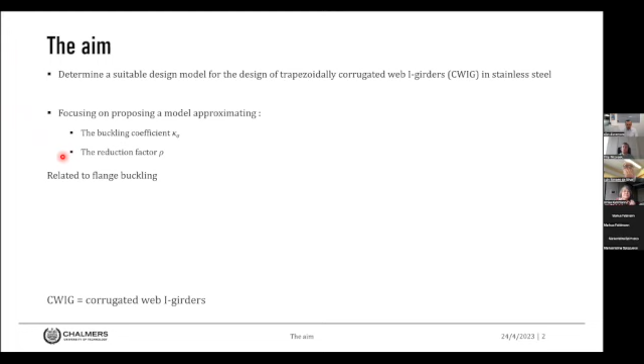In the next few slides, let us introduce a brief background related to our thesis subject. The idea behind using a corrugated web plate is to increase shear buckling capacity, meaning thinner web plates can be used without the need of vertical stiffeners. This contributes to reduced material use and production costs.

The shape of corrugation can vary. For example, it can be sinusoidal or trapezoidal, and the trapezoidal corrugation is the most common one and is the one treated in this thesis.

Continuing to the material aspect, why should stainless steel be preferred over carbon steel? Some major reasons include improved corrosion resistance, higher strength to weight ratio, and better performance in extreme heat.

For the design aspect of corrugated web girders, more specifically the flange buckling resistance, there are various design models available for carbon steel, but there is no commonly accepted procedure. For instance, there are several suggestions on the buckling coefficient used to calculate the relative slenderness used in the Eurocode. And for stainless steel girders, there are no available design models yet.

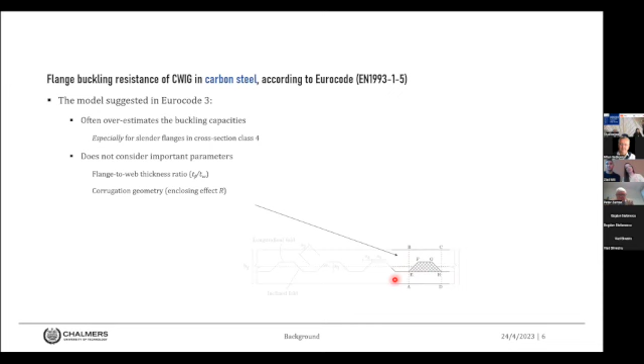There is an experimental and numerical study conducted by Jaeger et al., published in 2017, on the flange buckling resistance of trapezoidally corrugated web girders in carbon steel. This is the most extensive research done on this subject, where 16 girders were tested in 4-point bending to failure. This was followed by a large-scale numerical study on girders with different geometries.

In our analysis, the middle corrugated part in the constant moment region was modeled in the finite element software with the appropriate boundary conditions and two end moments, as seen here.

With the lack of available design models on the flange buckling resistance of trapezoidally corrugated web girders in stainless steel, the objectives of this thesis are to perform a numerical parametric study and investigate the buckling coefficient and reduction factor related to flange buckling of trapezoidally corrugated web girders in stainless steel. The second objective is to establish the relevancy of existing models for carbon steel girders applied to stainless steel beams. And lastly, if these models prove unsatisfactory, a new model is developed.

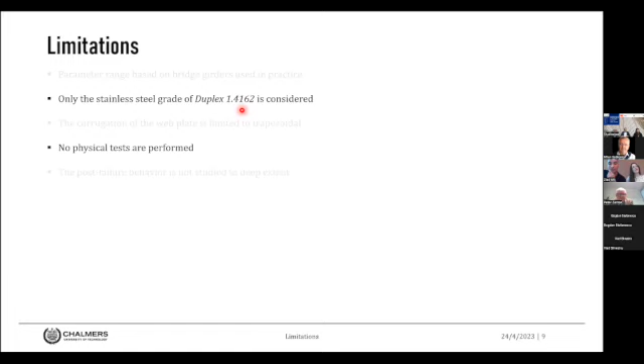Regarding our limitations, we should mention that only the stainless steel grade duplex 1.4162 is treated, and that no physical tests were performed in the study, only finite element analysis in Abaqus.

To conclude the validation study, all observed failure modes in physical experiments on carbon steel girders were reflected in the analysis, and even the ultimate capacities corresponded quite well.

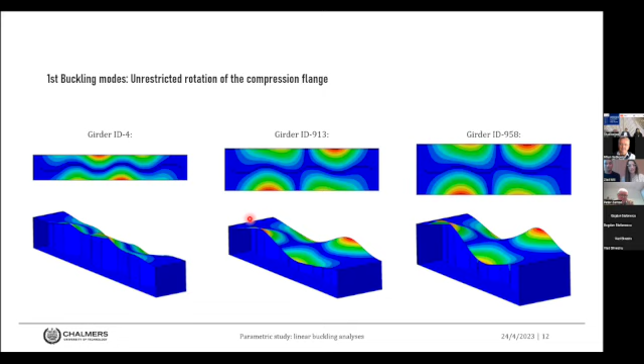The model of Jaeger et al. shows an improvement in scatter and safe-side results, but still considerable scatter. Taking into account more relevant parameters, the developed model of this thesis shows much lower scatter, and the results have an average overestimation of only 3%.

And on to our second half of the parametric studies, the nonlinear analysis. The initial mechanical and geometric imperfections are considered through an equivalent geometric imperfection, where the first mode is amplified by a factor depending on the corrugation geometry.

The required reduction factors from the finite element analysis were calculated as the ultimate moment capacity divided by the plastic axial capacity of a flange times the lever arm between the flanges.

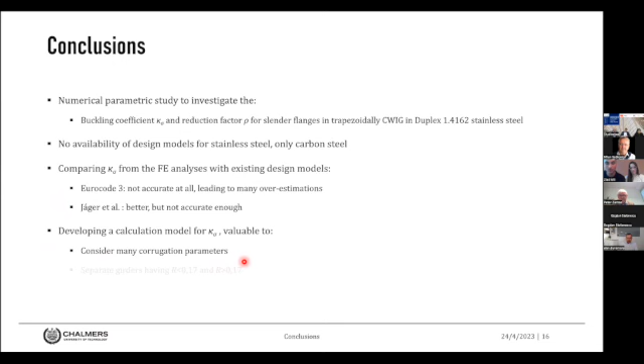And lastly, comparing the ultimate moment capacities from the finite element analysis with existing design models. Firstly, the Eurocode resulted in overestimations for almost all studied girders, and this was concluded to be the result of the too high slenderness limit suggested of 0.748, where 0.4 would be more reasonable.

The model of Jaeger et al. had some improvement in the lower slenderness range, but was still inaccurate. And lastly, the DASt-Richtlinie was the least accurate model.

So, given the results and the gained insight, a new model was developed in this thesis for estimating the ultimate capacity of trapezoidally corrugated web girders in stainless steel.

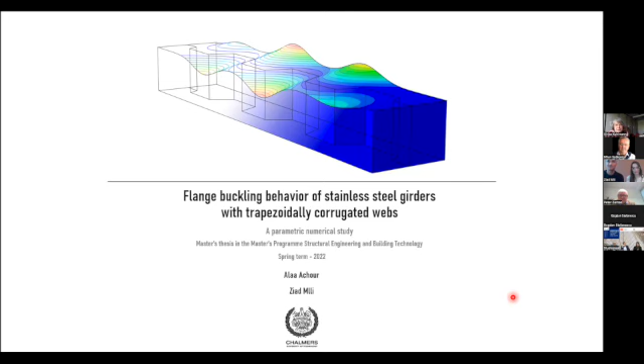Thank you very much for the very nice presentation. I'd like to start with your very beginning where you said that the corrugation mainly has the purpose of working against shear buckling. But concerning this transverse bending, of course, the corrugation also has a certain effect. Can you describe from the mechanical point of view what effect the corrugation has in the transverse direction?

Yes, so a major drawback of having a corrugated web is the reduced axial capacity, actually. So in many calculation models, the actual stiffness of the web is completely left out, not considered at all. So it's only the flanges that are considered to be working in bending. Now for the transverse bending caused by the eccentricity of the flat segments or the longitudinal segments of the corrugation...

That's not something that was taken into consideration or analyzed explicitly. It was purely finite element analysis that were analyzed, and the results were structured in a way that a new model could be developed, partly for the buckling coefficient, and then later on for the consequent reduction factor that could be expected.

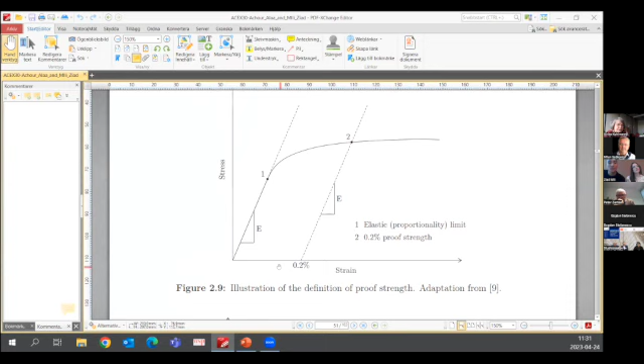But yeah, to summarize, much higher strength, lower stiffness. It reflected the material model.

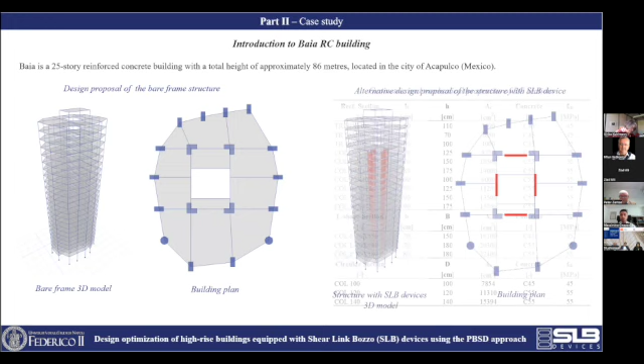The SLB device can be placed in the structure using diagonal steel braces or decoupled concrete walls. This second application is the most widely used today, in which the SLB system is placed in reinforced concrete structures. The case study consists of the structural design of a 25-story reinforced concrete building for which the use of the SLB system has been proposed as an alternative to the bare frame solution. The structural design has been carried out using the performance-based seismic design approach, following the provisions of the reference codes listed here in the slide.

The PBSD approach requires the seismic assessment of the structure considering different earthquake intensities: the service level earthquake, the design level earthquake, and the maximum considered earthquake. Regarding the seismic hazard assessment, the site response spectra were obtained from a ground response analysis of the soil, and at the maximum considered earthquake, the structure has also been analyzed with nonlinear time history analysis, considering the time series given here in the slide.

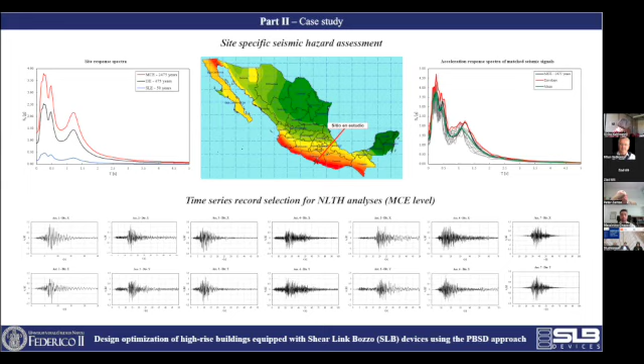The proposed SLB solution consists of 4 concrete walls per level placed from story 1 to 20. Each wall is equipped with 2 shear link devices belonging to the 4th generation, for a total of 160 dissipators. The comparison between the 2 structures, with and without the shear link devices, highlights that the use of SLB produces an increase in the stiffness of the structure, at least in the elastic range, as confirmed by the reduction of modal periods and, more importantly, by the reduction of the interstory drift ratios calculated at the service level earthquake according to a response spectrum analysis.

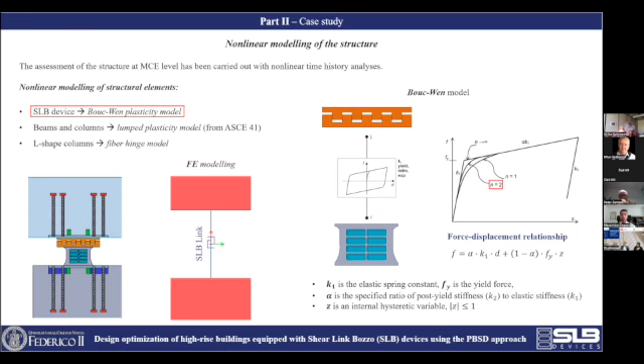As mentioned before, the assessment of the structure at the maximum considered earthquake has been carried out using nonlinear time history analysis. Regarding the nonlinear modeling of the structural elements, the Bouc-Wen plasticity model has been adopted for describing the nonlinear behavior of the SLB device, while a lumped plasticity model has been adopted for beams and columns, in this case following the provisions of ASCE 41.

Lastly, for the L-shaped columns a fiber model has been adopted, and in this case, the cross-section of each structural element has been discretized in a finite number of fibers, assigning to each of them the stress-strain relationship of the corresponding material. These are the main significant results obtained by the analysis at the maximum considered earthquake for the structure equipped with the SLB devices.

The structure meets all the global and local acceptance criteria imposed by the reference codes, and it is important to observe, considering the demand on capacity ratios at the collapse prevention, that the higher values are related to the SLB, while the corresponding ones for beams and columns are quite lower. This means, in other terms, that in this case the energy dissipation is mainly concentrated in the dissipators, as it is expected for this type of structural design.

Lastly, the seismic response of the structure equipped with the SLB device has been compared with the seismic behavior of the initial bare frame solution, also at the maximum considered earthquake. First of all, also in this case, the use of the SLB system leads to a significant reduction in the maximum interstory drift ratios. In this case, of course, comparing this seismic demand with the previous one, it is clear that there is a very strong nonlinear behavior

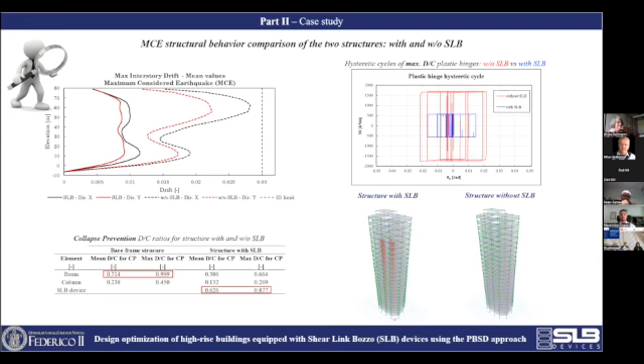In fact, for the structure with the SLB, the energy dissipation, as well as the maximum plastic rotation of the plastic hinge, is significantly smaller than that of the bare frame solution. In addition, the use of SLB leads to a reduction and an optimization in the amount of steel reinforcement used in the other structural elements of around 48%. Considering also an economic comparison between the two solutions, there is an economic saving on the total cost of the structure of around 12%. Therefore, the use of SLB devices is also economically justified.

In conclusion, the advantages given by the use of SLB devices are the reduction of the interstory drift ratios under seismic loads. The energy dissipation is mainly concentrated in the dissipators, and this partially preserves the other structural elements from damage. And there could also be an optimization in the amount of steel reinforcement in case of reinforced concrete structures. In addition, the SLB is a cheap metallic dissipator compared to other types of device, so its use is generally competitive also from an economical point of view.

And lastly, regarding the disadvantages of this system, of course, the assessment of the structure requires more complex analysis, such as the nonlinear time history ones used in these cases, and the use of SLB and their supports may be limited by architectural design choices.

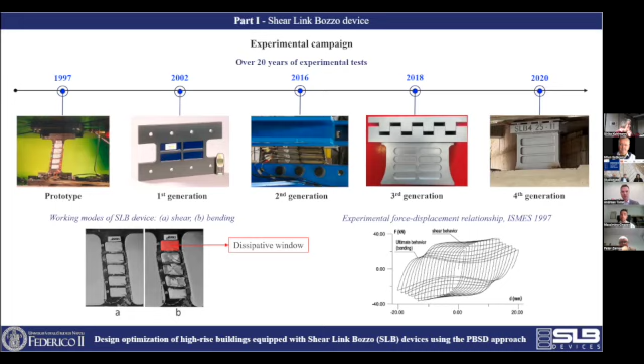Okay. Well, the two main significant features, in my opinion, for this type of dissipator: one is related to the fact that the dissipative windows are obtained with a milling machine. So the initial steel element is reduced in some parts in order to obtain these dissipative windows. So in this case, the stiffeners are not welded to the steel element.

And also the latest SLB generation presents a bottleneck connection, a particular connection to avoid the axial load transfer to the dissipator, because it has this toothed shape in order to avoid the transfer of the axial load to the dissipator under the gravity loads and also under the seismic loads.

But would you say, I understand with the milling you have no weld, just in the dissipative part, because of course then the connection plates are welded. But would you expect otherwise a weak spot in the weld? Is that your concern, or is it an economic question?

No, of course I would expect that. As we know, sometimes welding is a critical issue for steel structures in general, and can sometimes change the mechanical properties of the steel locally. So, if it is possible, I think this can be an advantage if there is no welding. But of course, I don't think it is more economical than the welding solution from this point of view.

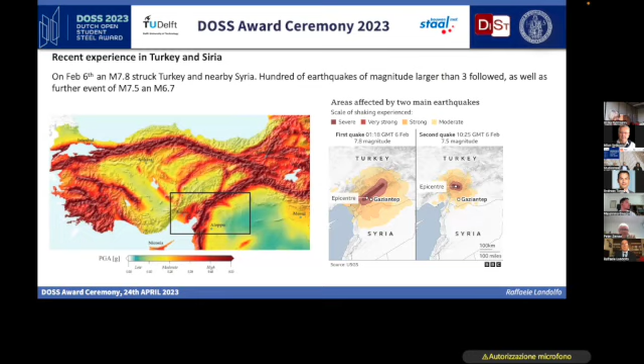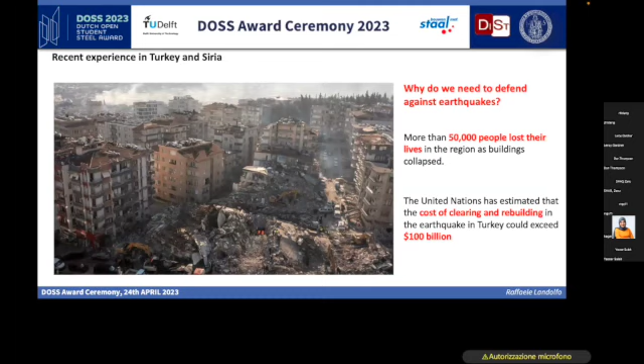A modern way to approach the problem of earthquakes is to talk about seismic risk, because seismic risk is a combination of three main factors: the hazard, the elements at risk, and vulnerability. In an urban context we cannot reduce the elements at risk. So the strategy for mitigation of seismic risk must be based on two actions. The first is a reliable evaluation of the seismic hazard, meaning a good seismic classification of the country. The second is the reduction of seismic vulnerability by means of good design of new buildings and retrofitting of existing buildings.

Now, the question is, what role can steel structures play in the mitigation of seismic risk? We can look to the lessons learned from previous earthquakes. As you can see, the excellent performance of steel structures was stated already in 1991 by the American Iron and Steel Institute after important earthquakes in the USA. Unfortunately, today we do not yet have a detailed report on the damage in the Turkey and Syria earthquakes, but I would like to share with you two experiences.

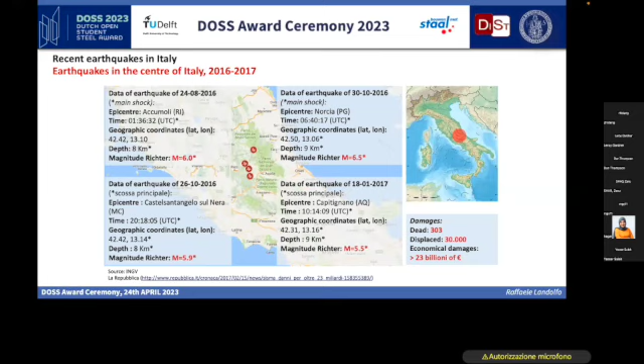And the first experience dealing with an important earthquake that occurred in Italy in 2016. Also, in this case, you can see that the magnitude of the earthquake was higher than 6, with a lot of damage on the buildings, in masonry buildings and concrete buildings.

And I can tell you that after the earthquake, a specific study was performed by a consortium of Italian universities devoted to the assessment of construction damage in the whole area. And as you can see from this investigation, only 2% of steel buildings suffered high damage, while more than 90% of buildings had no damage at all or lower damage.

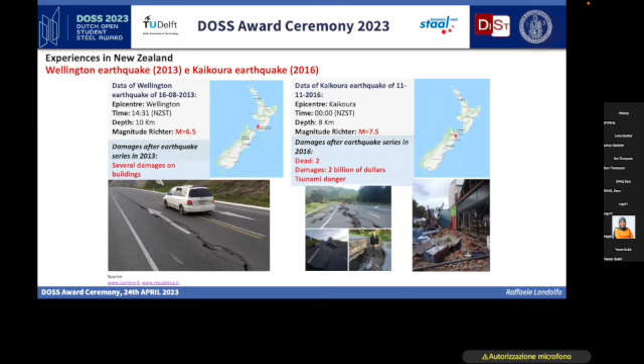The second experience deals with another aspect that, in my opinion, is very, very important for demonstrating the performance of the material in seismic application. I mean, the use of that material in the reconstruction. Here we are in New Zealand; in between 2010 and 2016, there was a very strong earthquake that completely destroyed the city of Christchurch.

We organized a conference in that city in 2018, and during the conference, there was a very interesting presentation from our colleague that demonstrated that more than 90% of the total floor area in the reconstruction of Christchurch was supported by steel structure. So this means that steel was the best option for the reconstruction of Christchurch.

And in fact, the city was a sort of open lab where it was possible to see each kind of steel structure. And this was very, very good news for us. So now I would like to say why steel structures are so resilient for seismic application. Let me just remind you that resilience is a general concept.

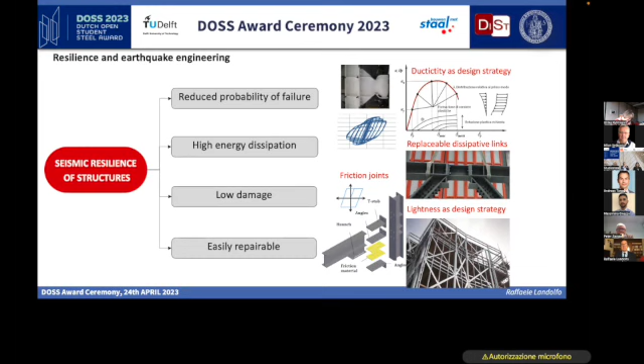If we apply this concept to earthquake engineering, we can say that a seismic resilient structure must provide a reduced probability of failure, high energy dissipation, low damage, and must be easily repairable. Steel structures provide all these characteristics. Why? Because all these characteristics are strictly connected to material properties in terms of strength, ductility, low weight, and repairability.

Let me just quickly say something. If we talk about strength, I can remind you that steel is the material with the highest strength-to-weight ratio. That means good performance, it means lightness of structure. But in seismic application, even more than strength, ductility is very important.

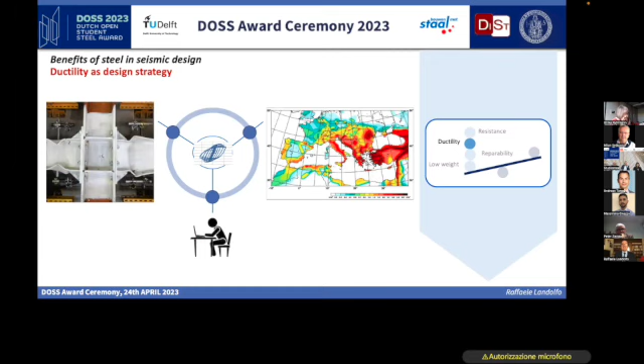And if we look at ductility, we can have excellent ductility at each level: material level, member and connection level, structural system level. This is the reason why, in my opinion, steel is the best solution when you design by using ductility as a design strategy. And because in this case, you can have a lot of options.

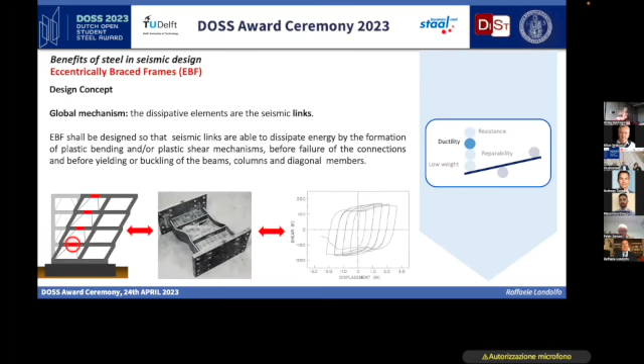For example, in the case of a moment resisting frame, you can locate the plastic deformation at the end of the beam. In the case of concentrically braced frames, you can have good behavior locating the plastic deformation in the bracing. And in eccentrically braced frames, you can use the good behavior of the link for dissipating the energy. But in addition, you can also use the connection for this plastic deformation. So you have a lot of possibilities for well-designed steel structures using ductility.

But this is not the only main aspect, because when you design by using ductility, it means that you are accepting the damage. And this means that you must be able and ready to repair the structure. And also in this case, the steel solution can be the best one, because I will show you later on some systems that can be easily repaired, easily replaced. And this is a very good aspect for seismic application.

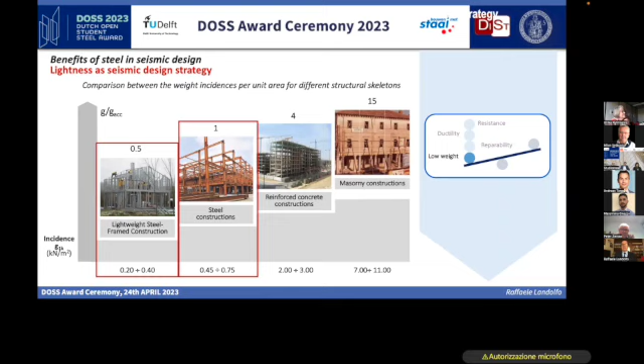Finally, you can also use lightness as a seismic design strategy, because in the case of steel structures, you can also have solutions like lightweight steel framed construction that, thanks to the lightness, can be designed without using ductility, designed in the elastic phase, and so without damage. Let me just quickly show you some research projects in which we can confirm this statement.

The first project is the DUAREM project that was developed by a consortium of European universities. As you can see, during this project, we performed a full-scale experimental test on a dual eccentrically braced frame with removable links. So the idea is to have the plastic deformation in the link, and to use the recentering behavior of the moment resisting frame. And this was a very, very good seismic option.

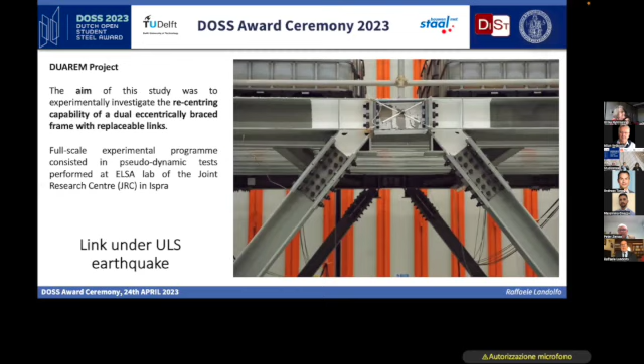Here I'm showing you some video in which you can see the plastic deformation of the link during the test, according to the design concept that I explained before. I don't have much time, so I will go quickly through this movie. And in the next movie, I would just like to quickly show you the phase in which the link is replaced after the plastic deformation.

And these two external moment resisting frames provided the recentering properties in order to have the structure in a perfect vertical position after the plastic deformation. This is an example of having an easily repairable system.

Another example is this project. The name of this project is a FREEDAM Project, in which, as you can see, there is a different concept. This kind of connection is based on the friction dampers. And as you can see from the movie, we can have a very large rotation capacity without the plastic deformation. So this means the possibility to dissipate the seismic energy without damage, without plastic deformation.

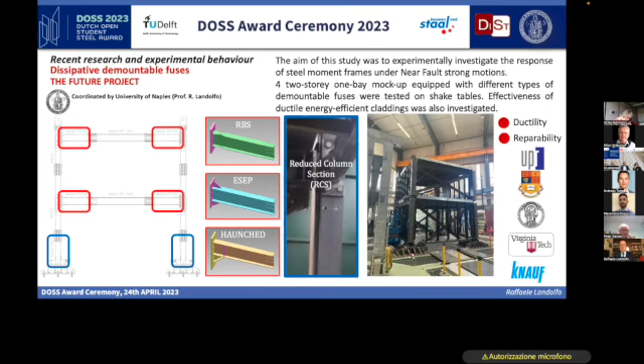And I would like to show you the tremendous... and as you have seen, a tremendous seismic input without important damage. These are very, very good results. Finally,

lightness as design strategy, lightweight steel framed construction. Another research project, European research project, ELISSA project, devoted to study energy efficient, lightweight, sustainable, safe steel construction. The solution in order to get this performance by building was to use a lightweight steel construction that was not only good design from a seismic point of view, but also from energy point of view, thermal point of view, fire point of view, and so on.

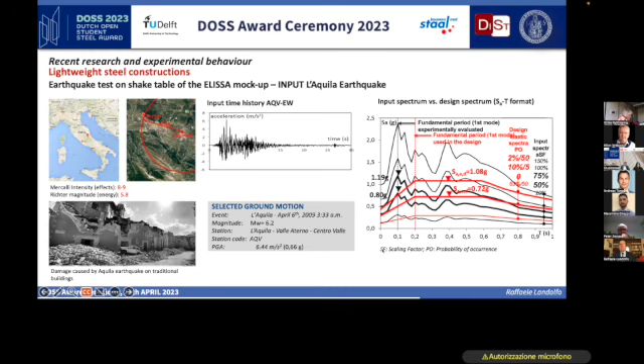And thanks to the lightness, we apply to this system very, very strong real earthquakes. That was the earthquake that occurred in Italy in 2009 with a lot of huge damage. We apply an earthquake 1.5 times this real earthquake. And once again, you will see that the damage will be very, very low due to this lightness.

So, in conclusion, I think that the problem of seismic risk is for sure a crucial issue all around the world. The lesson learned from the past earthquakes demonstrates that steel structures can provide an excellent behavior also in the past. The resilience of steel structure is a consequence of the material properties and technological requirements. And also these projects that I quickly showed you confirm this statement. So in my opinion, the last sentence is, please don't forget to use steel in seismic application.

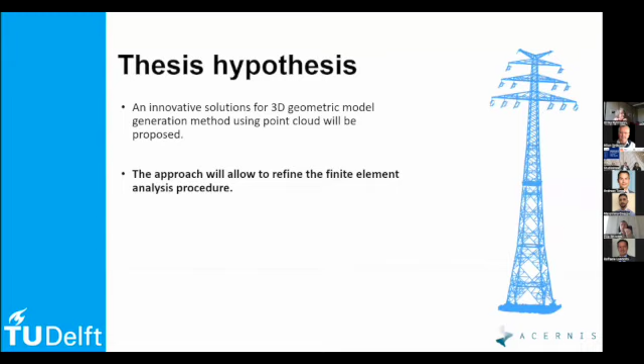What came out of it is that for a lot of those lattice tower structures, there is outdated or even missing documentation for towers which were erected over 40 years ago. This thesis tried to address this problem by proposing an innovative solution to generate a 3D geometric model using point cloud data, which also refines the finite element analysis procedure by using the real data of the structure instead of design documentation.

When it comes to the methodology, I'll focus on the modeling process performed for this thesis. The entire approach can be split into 3 sections, starting off with a global segmentation of our tower into smaller segments. After that, in each of those isolated segments, we identify each member and cluster it into a separate data cluster. At the member level, we detect the corner point of an L-shaped profile and fit a polyline to each member, which concludes the modeling procedure and allows us to generate the 3D model that can later be utilized in finite element analysis.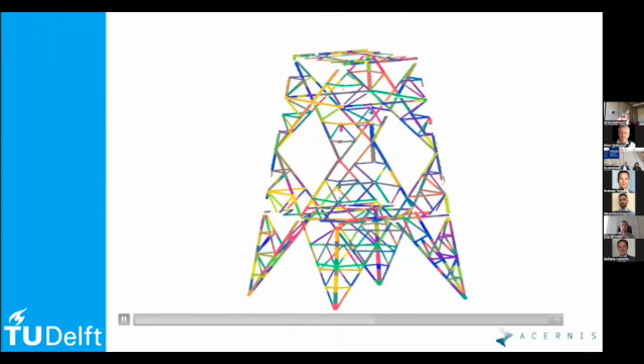Now I will present to you the entire process in a short video. We start off by the global segmentation, and each segment is isolated as depicted in those different colors in the video. After that, in each of those segments, we isolate each member. Finally, for each of those isolated members, we fit the corner points of the L-shaped profile to which a polyline is fitted, allowing us to create the 3D model which we can later use in our analysis.

The proposed method allows for automatic geometrical model generation without the need of manual processing and predefinition of analyzed tower geometry. The entire process has been scripted, and as an input it uses the point cloud data, and as the output gives us the 3D CAD model. The positioning of the system line for the structural members is also based on the geometry of the in situ analyzed lattice tower instead of using the geometry based on design documentation.

The generated model in this thesis was later used to compare the real data of the model based on the point clouds and the design documentation at 2 stages. The first stage was a geometrical comparison, where the model based on design documentation and the model based on the point cloud data were compared.

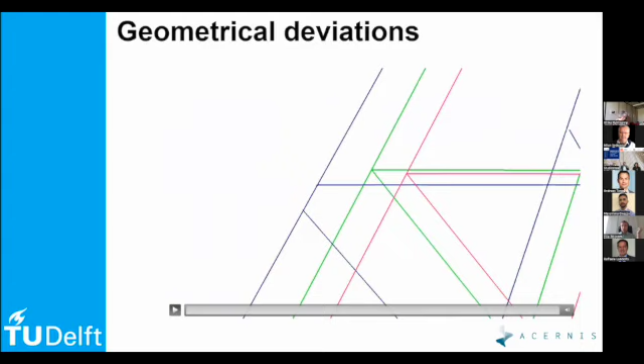The blue model depicts the model based on the in situ data. The green and pink models depict the models based on design documentation. As you can see, the biggest deviations occur especially in the connection region, where the eccentricity of the connection and the differences caused by the shift of the real position of the members compared to the design documentation lead to divergence in geometry of the real structure compared to the one based on the design documentation. Those deviations had an impact on the finite element analysis results.

Based on the results, three main points can be outlined, starting off with the deformation. The response of the point cloud-based model to the applied loading was equivalent to the idealized model. For both models, the same failure mechanism occurred, by the failure of the main diagonals in the bracing of the segmented element of the structure which was analyzed.

Even though the deformations were very similar, the large divergence in force redistribution caused by different imperfections and eccentricities added to the in situ-based model caused the difference in results when it comes to the internal stresses for the analyzed member. The difference was up to 60% comparing the model based on in situ data and design documentation. What's more, the initial imperfections introduced to the point cloud-based model led to a significant reduction of members' ultimate resistance, up to 30% reduction for 3 out of 6 analyzed members.

To sum up the conclusion, based on the finite element analysis results and showcasing the usefulness of the model based on real data, final conclusions can be brought. First of all, improved efficiency, which allows for fully automated model processing, enabling repeatable results and saving time which would normally be required for manual drafting and processing to achieve such a model. This increased efficiency can result in a reduction of project timelines, costs, and resources required.

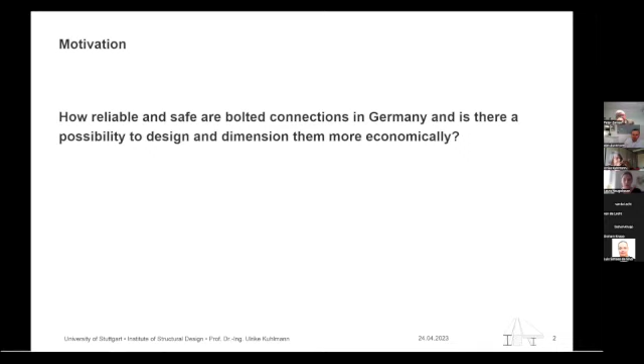The motivation or question I dealt with was: how reliable and safe are bolted connections in Germany, and is there a possibility to design and dimension them more economically? To answer the question, I carried out a statistical evaluation of the design concept of DIN EN 1993-1-8 and the draft prEN 1993-1-8.

And also I did a parameter study. In both cases, with a focus on the bearing resistance of a bolted connection.

Those both design concepts of the bearing connections are shown here. On the left side, we have the design concept of DIN EN 1993-1-8, and on the right side, the design concept of the draft prEN 1993-1-8. Between these design concepts, there are a few differences, and the main one is that the design concept of the draft prEN 1993-1-8 is shorter, since there's no longer a distinction between the direction of the load.

In addition, the maximum values of the parameters changed, and the design was extended up to steel grade 100.

So let us now turn to the statistical evaluation. I used the evaluation procedure according to DIN EN 1990 Annex D, and this starts with the design concept, which we already covered, but then the next step was the comparison of the experimental and theoretical test data, which is also shown here graphically.

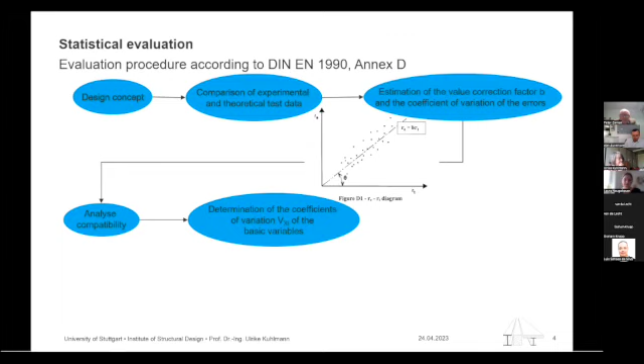The next step is the estimation of the value correction factor B and the coefficients of variation of the errors, and checking the compatibility of the design concept and the test data. The fifth step was the determination of the coefficients of variation of the basic variables and the determination of the characteristic value Rk and design value Rd of the resistance. The last step is the determination of the safety factor, or rather the corrected safety factor.

All in all, at the end we had to see that gamma m star had to be smaller than gamma M2, which is 1.25, to be safe, because I only deal with the resistance.

I now want to continue with the results of the evaluation. The data sets I used were divided into 6 groups, and this table shows the results of DIN 1993. In the first column there's the evaluation group and the steel grades. The second column is the respective number of bolts of the test connections, and in the third column the number of test results. For the different groups, both the determined value correction factor B and the corrected partial safety factor are shown.

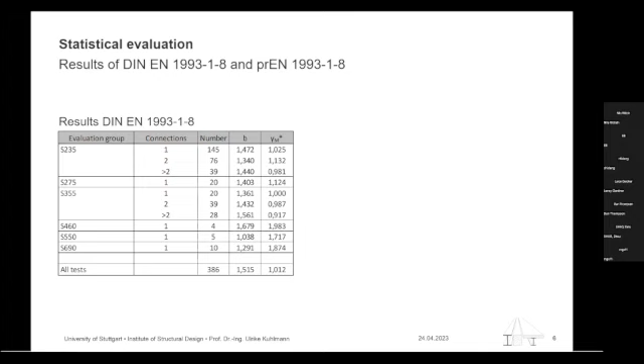On the right side, additionally, are the results of the design concept according to the draft prEN 1993-1-8. I don't want to discuss all of these numbers, but I want to show you the partial safety factor of all tests and compare them, because the partial safety factor of the draft prEN is higher than the one from the DIN, and it's also closer to the gamma M2 factor.

So we can sum up that DIN EN 1993-1-8 is safe and reliable because it's smaller than gamma M2, but the bearing resistance is underestimated, which leads to uneconomic design of connections. Now we can say that DIN EN 1993-1-8 leads to conservative results.

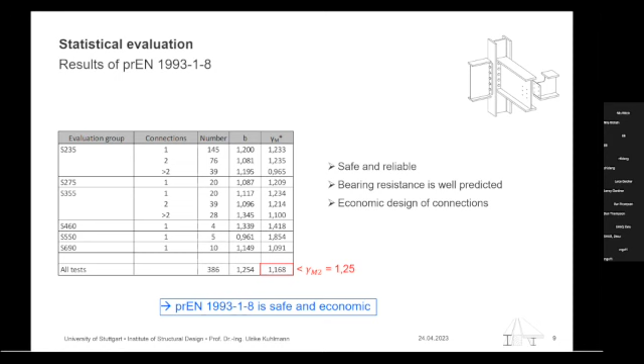To come to my conclusion, both design concepts are safe and reliable. The design concept of DIN 1993-1-8 leads to conservative results. The draft prEN results in more economic connections, and in the draft prEN 1993 only the edge and hole distance in the direction of the force have an influence on the actual bearing resistance, while the edge and hole distance transverse to the force have no influence on the actual resistance.

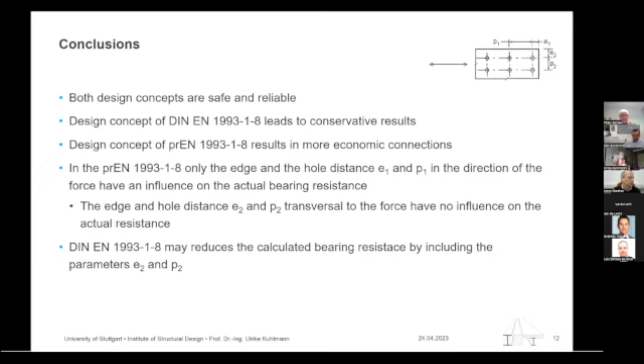Additionally, I can say that DIN 1993 may reduce the calculated bearing resistance by including the parameters E2 and P2. And to answer the question from the beginning: the bolted connections in Germany are safe, but with the draft prEN 1993-1-8, a possibility was found to make the connections even more economic.

We're getting consistent output from all of our operators on all of our shifts, where in the past it might vary on the skill of your operator or their work ethic. The operator can focus on processing steel. All these little things the operator doesn't have to know, the machine knows and does for it. And it's made all the difference. Everything is so much faster. We don't have to train as long. And what that meant for us was tripling revenue, probably tripling the steel output. That's what integration is. Your machines are doing what they need to do. You can't speed them up. All you can do is slow them down if you're just not paying attention.

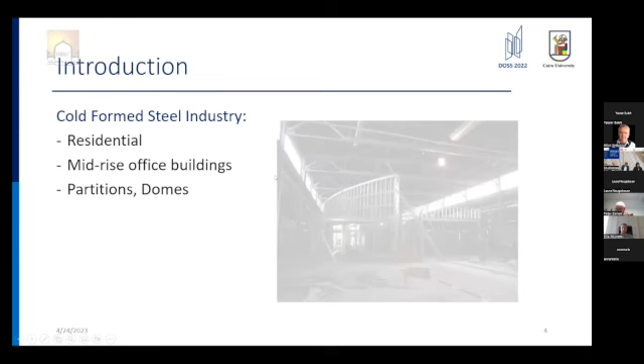So as Professor Raffaelli explained minutes ago, lightweight steel structure is an attractive solution right now. It can be used for residential structures, multi-story office buildings, and also structures like partitions or domes. This is due to the fact that cold-formed steel has a high strength to weight ratio and can give a more economic design when compared to hot-rolled steel. The question is, what about the seismic performance or the seismic design of cold-formed steel?

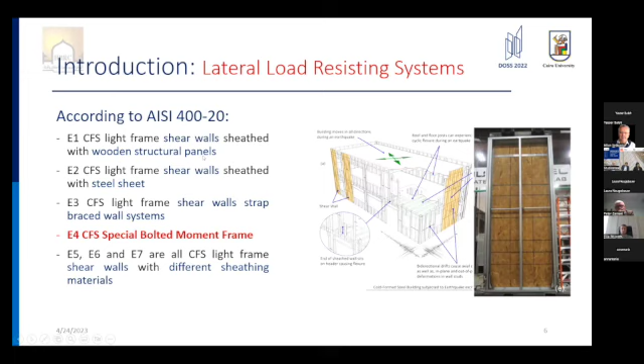The AISI 400, 2020 edition, gives us guidelines for the design of shear walls fabricated from cold-formed steel. However, you can only find one section that discusses moment-resisting frames fabricated from cold-formed steel. So this implies that using cold-formed steel as a moment-resisting frame is an active field of research. Accordingly, this research aims to investigate the performance of cold-formed steel subjected to cyclic loading, whether we use bolts or self-drilling screws as fasteners for these connections.

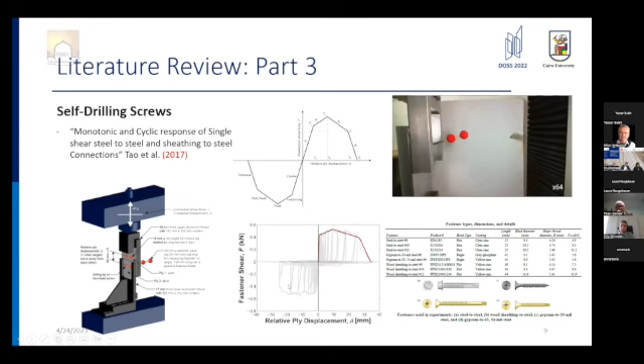The literature review was divided into three main parts. However, for the sake of the presentation, I'll only mention the screw-fastened connections part. A paper published in 2017 investigates the performance of screw-fastened connections subjected to cyclic loading, and we can see here the signature curves of self-drilling screws under cyclic loading. This shape of the hysteresis loops is very common in other research as well, as in the 2016 and 2020 papers, where self-drilling screws were used.

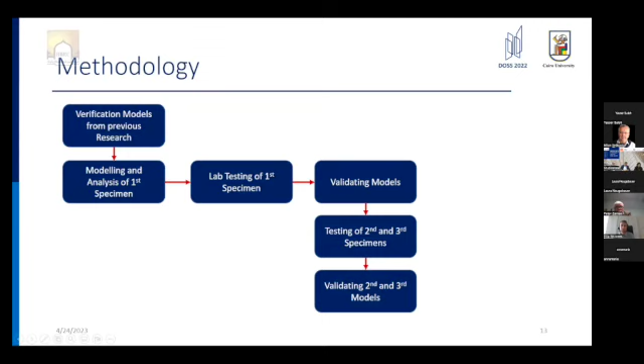Finally, to conclude this part, we came up with the configuration of the connection tested in the study by studying the previous work of other researchers. The methodology was modeling previous work, then modeling our first specimen, testing it and validating the results, then continuing the testing of the other specimens and validating our work again, and finally the parametric study.

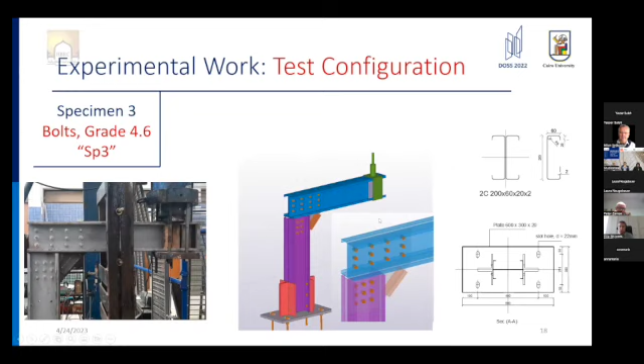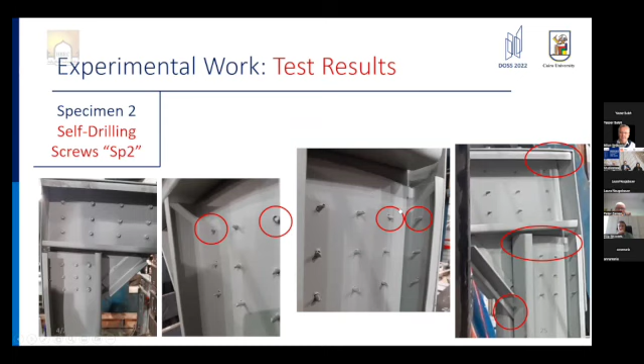So the finite element modeling of the screws actually was very challenging, because of the phenomenon where the screws, when loaded in a certain direction and then reversing the load, the screw actually tilts, and then when you reverse the load, no load bearing capacity is recorded until the screw returns to its original position, and then it regains its capacity to carry loads. So this actually was very challenging to model.

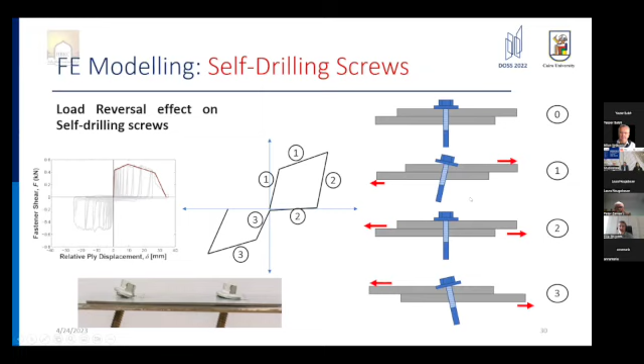Our first proposed solution was to use what we called compression-only springs. It was initially very good and gave promising results. However, the only problem, and it's a major problem actually, is convergence errors, especially with large deformations.

The second, which was working and was adopted in this research, was using previous work by Chu Ding, which is programming user element subroutines, basically programming a new element in Abaqus using Fortran. The pro is that it works, and the only disadvantage is that it's very complicated compared to other techniques.

As for the bolts, for the finite element modeling of the bolts, we used solid elements to model the bolt rather than the famous point-based fasteners.

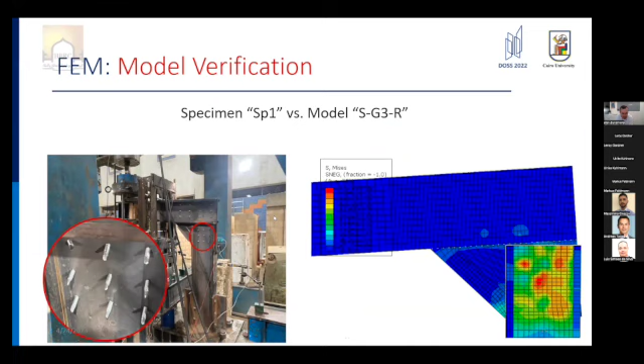The model verification part. So we compared the deformed shape of each specimen with its Abaqus counterpart. And we can see here the stress concentration at the location of the screws. This is a comparison between the results. You can see the differences reached 18% when loading the specimen upwards, however only 9% when loading the specimen in the downwards direction. And the difference in energy dissipation was 8%.

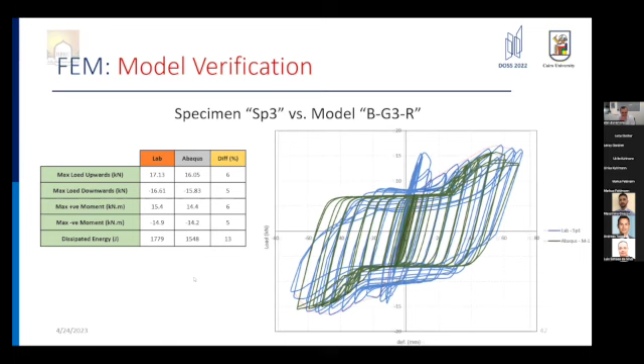So the parametric study: the parameters that we studied were the use of screws only, the use of screws in addition to the top plate, or the use of bolts. And G3 stands for the gusset plate thickness. This is the naming convention of the models. And R stands for rectangular arrangement. We tested a rectangular arrangement in the column, a circular arrangement, and a diamond arrangement based on work from the literature.

The first parametric study focused on the use of self-drilling screws only. So S-G4-R provided the best performance. However, changing the gusset plate thickness made only slight differences in the moment capacity or energy dissipation. The second parametric study focused on the use of screws in addition to a top plate. Also, the one with the highest gusset plate thickness was dominant.

The third study was focused on the bolted connections, and G4R, or the gusset plate thickness of 4 millimeters, wasn't superior in all cases. There were cases, especially when loading the specimen upwards, where the gusset plate thickness of 3 millimeters was better.

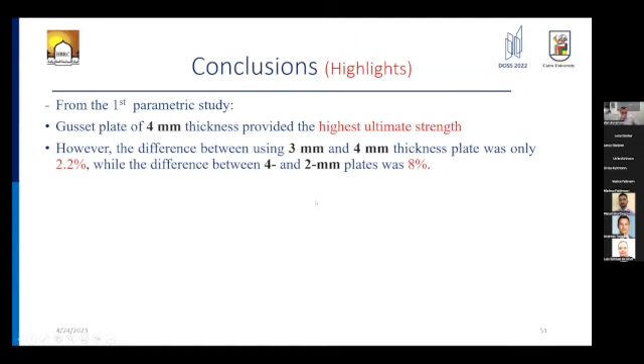Finally, the conclusions. From the first parametric study, increasing the gusset plate thickness wasn't very efficient, especially because the failure mode was tilting of the screws. So changing the gusset plate thickness wasn't very effective; the screws were more critical. And this applies to all types of models that we modeled: the circular and diamond arrangements provided no advantage in terms of strength or energy dissipation.

From the second parametric study, a similar conclusion can be drawn. Changing the gusset plate thickness affected the capacity by 16% and dissipated energy by 13%. However, the additional top plate managed to increase the resistance of the connection significantly. This increase reached 41% in the moment capacity and 28% in the dissipated energy.

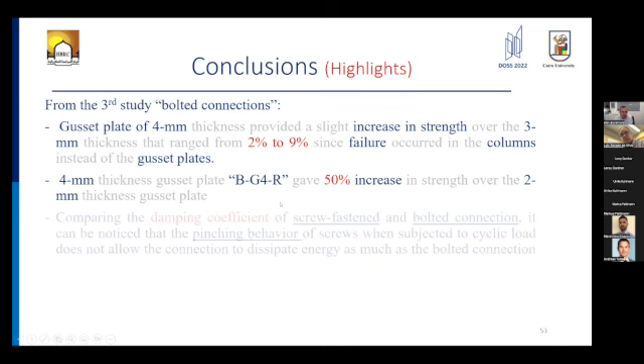From the third and last parametric study, the conclusion is that the gusset plate thickness only increased the capacity by 9% in strength, while there was a 50% increase of the 4 millimeters gusset plate thickness over the 2 millimeters.

A very important aspect I included in the study is the damping coefficient, which is another measure of the energy dissipation, where you can see that the bolted connection can perform very well in dissipating energy compared, of course, to the self-drilling screws. This increase was 3.5 times.

Finally, you can find the testing videos in the paper we published a couple of months ago from this work.

Yeah, so the idea is to see if it's possible to depend on moment resisting frames in resisting the lateral loads. In lightweight steel structures, it's very common to use the shear walls setup while using cold formed steel, and it's not very common to use moment resisting frames. So the idea was to investigate the possibility of using moment resisting frames, and this starts with investigating the connection and the behavior of the connection subjected to moments.

Okay, thank you. And I think from your thesis, you used grade S350 steel for the full-scale experimental tests. Yeah. Would there be any difference or advantage if you used S450? Do you know? Any benefits or differences, do you think?

Well, most of the failures or the deformation was in the connection itself rather than the cold formed section. So maybe changing the grade will change this. I'm not sure. Actually, the cold formed steel sections themselves had higher moment capacity. I mean that the failure occurred in the connections in most of the cases, except for the bolted one, the gusset plate, where we observed the failure.

So in case of using self-drilling screws, reducing the grade of the steel, I don't think it will affect the behavior of the connection that much, since the screws failed in tilting. But in the bolted connections, maybe that will affect the performance of the connection. Yeah, okay, thank you.

And final question. I was curious that I think you used Fortran as the programming language rather than Python, which is what Abaqus was using. Was there any reason for your choice of the programming language for the subroutines? Yeah, Python cannot be used for subroutines in Abaqus. It can only be used for automating things that already exist in Abaqus.

Fortran is the only solution if someone wants to program, as in our case, a new element that does not exist in Abaqus. Okay. Python cannot do this job in Abaqus. Very good. Understood. Thank you for that.

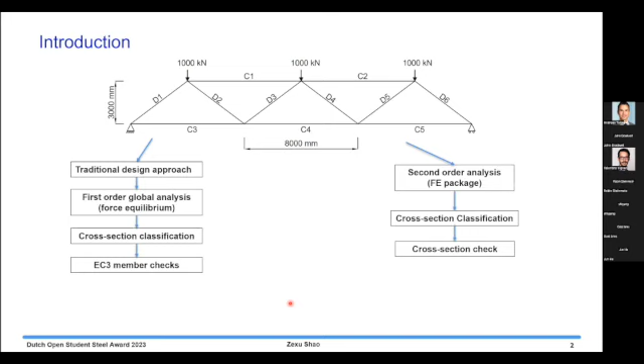So first things first, normally when we talk about steel truss design, we could go with a traditional Eurocode 3 design approach followed with Eurocode 3 member checks, or we could carry out design by advanced analysis followed with cross-section checks. But no matter which method we use, cross-section classification is required. We have been using cross-section classification for decades, and it was designed specifically for the ease of hand calculation.

So are there any drawbacks to cross-section classification? I'd say it does not consider the effects of strain hardening, and it does not take into account the actual deformation demands of a structure during its service. Additionally, the classification system itself is based on discrete classes, so it may not fully capture the spread of plasticity. These drawbacks lead us to a question: is there an alternative method which could replace cross-section classification? And it brings us to the topic of my research. The idea is to use strain limits.

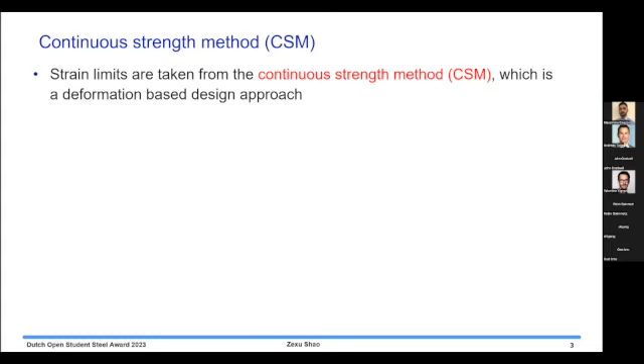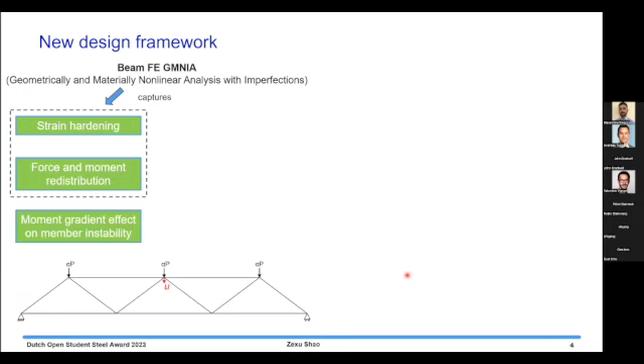Now for steel truss design, we can carry out a beam finite element model with GMNIA analysis, and the analysis itself can capture the beneficial effects of strain hardening, force and moment redistribution, and moment gradient effects on member instability. But the extent of these beneficial effects is much more dependent on the failure point. The model can predict member buckling, frame buckling, and material yielding. But at this point, we are not able to predict anything about local buckling, so we cannot say whether the predicted result is safe or not.

So it's time to introduce our strain limit. The strain limit itself can capture local buckling to fill the gap of the original beam finite element model. Additionally, it takes into account the moment gradient effects on member instability and also includes the influence of shear.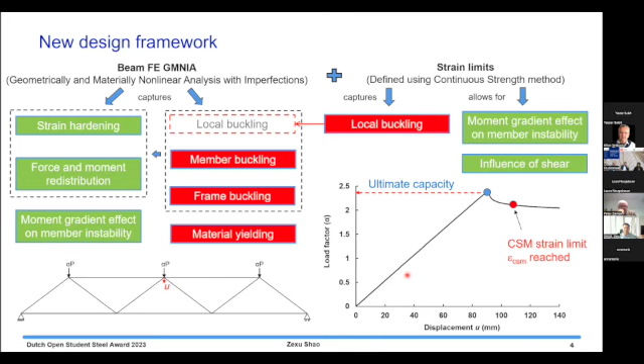So for example, from the beam finite element model with GMNIA analysis, we have the load-displacement curve. We have two cases in total. The first case is when the CSM strain limit is reached before the peak load; the ultimate capacity can be taken at the failure point. Or we could have the CSM strain limit reached after the peak load, and for this case, the ultimate capacity should be taken as the peak load. So this is an overview of the proposed design method.

But the primary purpose of my study is to investigate the applicability and accuracy of the proposed design method using the CSM strain limit. So we need to create a benchmark shell finite element model, which serves as a reference for comparison purposes. As we want to make sure this is a representative benchmark, everything is required to be modeled directly.

For the member bow imperfection, I use the reference value of L/1000 for both in-plane and out-of-plane, and the local plate imperfection suggested by Eurocode 3 Part 5, and also the quad-linear material model is adopted here to capture the material nonlinearity. The ECCS residual stress pattern is incorporated into our model as well. So combining everything I mentioned previously with global imperfection, the shell finite element model looks like this. But please note the amplitude of the imperfection has been scaled to a very large number, just for illustration purposes.

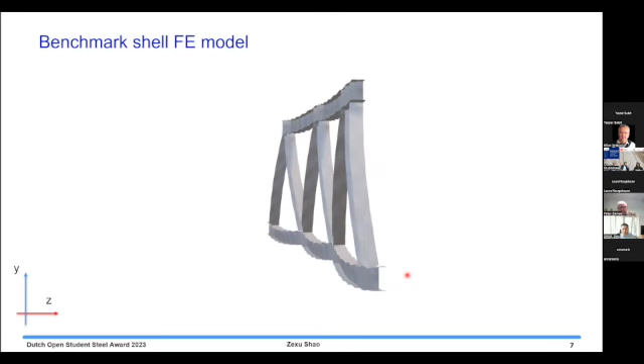As we want to investigate a wide range of different trusses, with different geometries, different types of truss systems, or different cross-sections, everything is pre-processed in MATLAB programming to streamline the modeling process.

Apart from the proposed design method, I have also used some other available design methods in the literature for comparison. Before I discuss the design methods I have used, it is important to note that the pre-Eurocode 3 Part 1-1 has categorized each design method according to complexity. M0 stands for the simplest and M5 for the most complex one. Apart from that, we adopt the notation from Eurocode 3 Part 1-14 for LA, GNIA, and GMNIA.

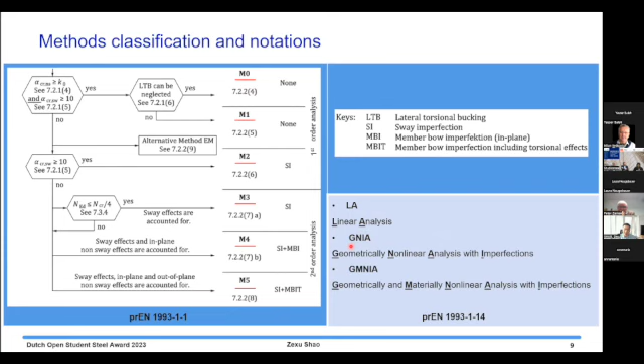So in total we have 5 different design methods. Design method 1 is basically a linear analysis followed by Eurocode 3 member checks. For second order elastic analysis, we have design method 3 and design method 2. They both employ the cross-section check to find the ultimate capacity, but differ in the equivalent bow imperfection adopted and the type of cross-section check.

Apart from that, we have design method 4 and design method 5. They both are designed by second order inelastic analysis, employing the same equivalent imperfection for GMNIA analysis and the quad-linear material model. But design method 4 uses a nonlinear cross-section check, and design method 5 is our proposed design method, of course using the CSM strain limit.

So from design method 2 to design method 5, they all use the beam finite element model for design, but just differ in the equivalent imperfection adopted and the material model. So for I-section trusses, the element I used here is the B31 open section element, and the mesh size is controlled to be smaller than the local buckling half-wave length.

I have a couple of questions. The first one is really stated in your conclusions. You state that the CSM strain limit eliminates member capacity checks. Is this correct, what you're saying? I assume you're talking about the traditional Eurocode 3 member capacity checks.

Yes, exactly. If you use the CSM strain limit, then you don't need a member capacity check anymore. Is it really that, or is it because you're using equivalent to method 4 and inputting the imperfections, so it's not the merit of the CSM, it's the merit of the fact that you're modeling explicitly the imperfections and residual stresses? So even in your DM4, you don't do explicit member checks, right? It's not because of CSM that you're avoiding the member check verifications, it's because you're using more advanced modeling and nonlinear analysis with imperfections included, right? Yes, you are correct. We don't need the member checks, but in contrast we use cross-section checks, but it's still based on element level.

Sure. And my second question is, we see throughout your results that you get a very good match between your methods 4 and 5. I mean, GNIA with nonlinear cross-section and GMNIA with CSM, they virtually give very much the same result. Not for this example, but the design example you present, you have 1673 versus 1664. And this is very consistent across your details. So basically it means that M4 with nonlinear plastic gives a result very similar to CSM. Do you think this trend is just a coincidence here, or is it something you expect will occur throughout your future reliability study and expanded parametric study?

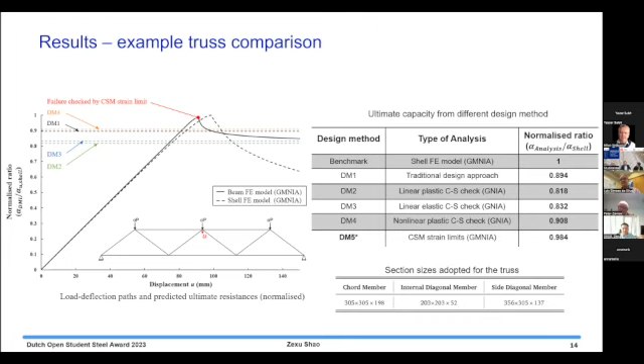So we have now to start with the most interesting part. I think we all have become richer for experience, but some of the nominees will become richer in money, also in euros. So I would like to ask jury members to place their votes.

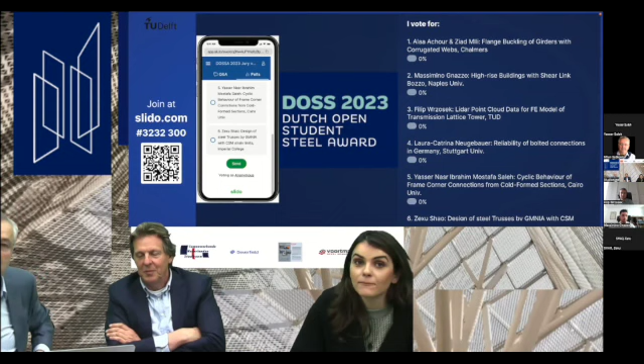You know that the winner will receive also travel to the Eurosteel conference. Do we have a slide from the Eurosteel conference? Nice opportunity for Filip to visit again the Netherlands, for a long time.

Filip, do you want to say a few words? Thank you for giving me such an opportunity to present my presentation regarding my master thesis in such a wide group of people working within the steel structure industry. It's a great pleasure because I'm still working within the topic, and it's a great way to go back to this more scientific part of the field, coming from now working in the industry for almost 2 years as well. So yeah, it's a pleasure, and I will be more than happy to present it again in September. Thank you very much.

Thank you, Filip. I think Marcus is also happy, so he can ask additional questions when you are presenting at the conference. Definitely. The Bouwen met Staal people will help us in communicating with you and arranging the accommodations and traveling. But we also have the second winner this time.